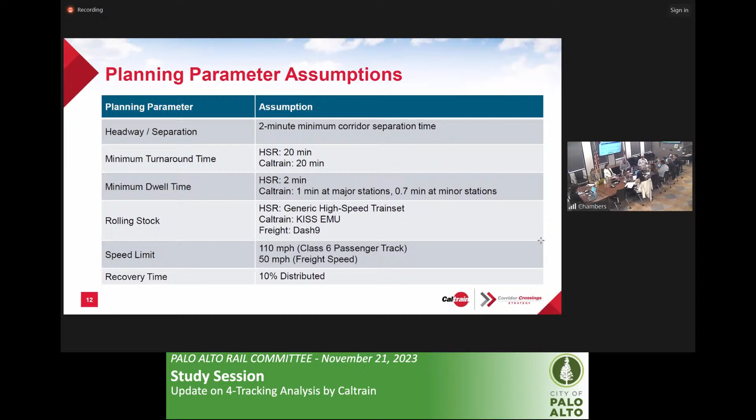And then just one item, as Councilmember Burt mentioned, in terms of having recovery time or accommodated time in the schedule—there is 10% of that distributed across the corridor, and that's to be able to maintain on-time performance. That's the reason why it's there.

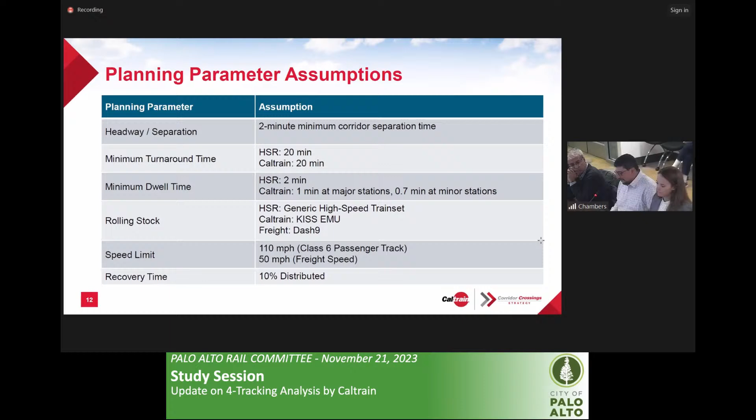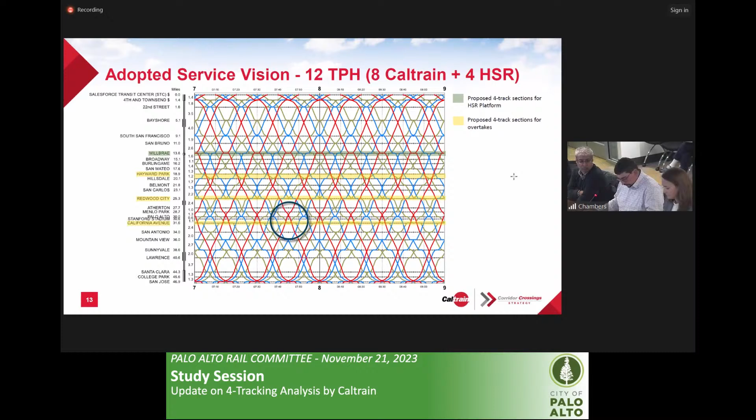And the technical term for those who are interested is string line diagrams.

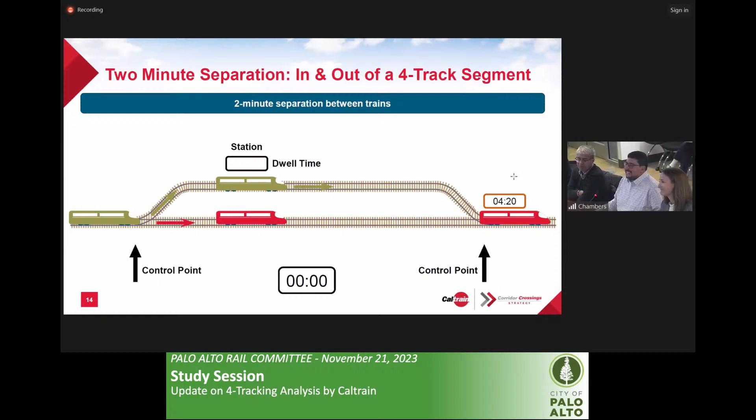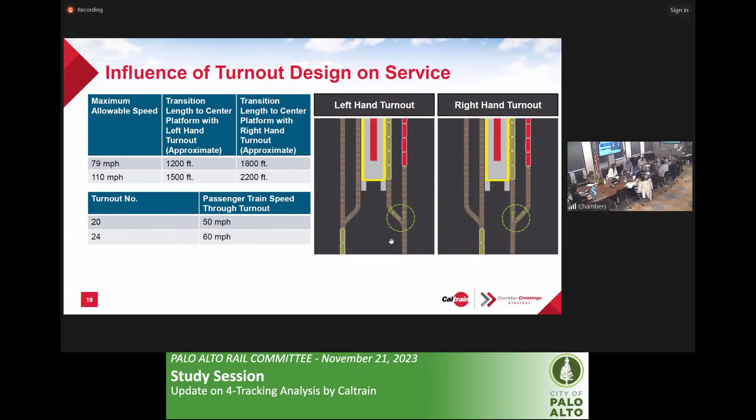Can I ask a quick question? I think Metrolink uses turnout number 24. I'm curious, does anyone use one that's designed for faster speed above the 24? Currently in operation, no. So that's why we're conservative with the number—24s. Thank you.

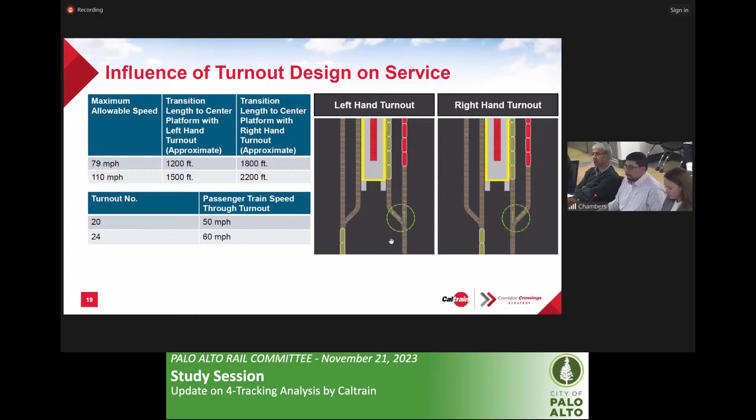You mentioned the need for, or preference for, space for a vehicle on the outside of the track—so is that a necessity or a preference? It's preferred, and whether it's a necessity depends on the conditions of the location, so it's context sensitive. Typically, yes, a railroad would want to have space for a vehicle to be able to go. The reason is that a vehicle has to go onto what's known as high rail to get onto the tracks, and there are specific points where a vehicle can and cannot go onto the railway. So high rail is when you have a maintenance vehicle actually running on the tracks. On the tracks, correct. And what's the downside of that again—there are places you can't do that, you said? It's because it can affect the operations of the corridor, so you try to minimize that as much as possible. Got it, okay, thanks.

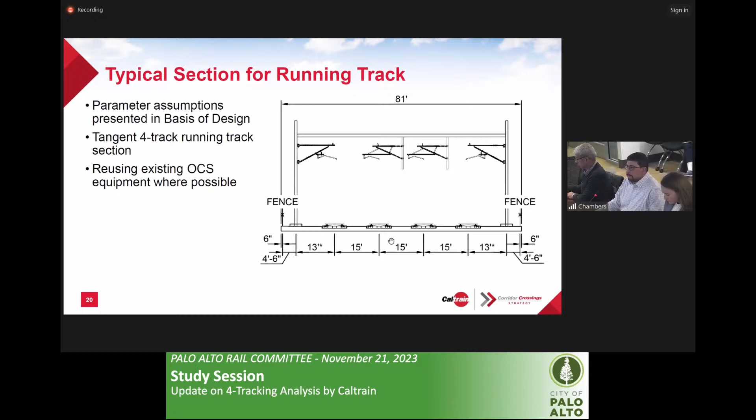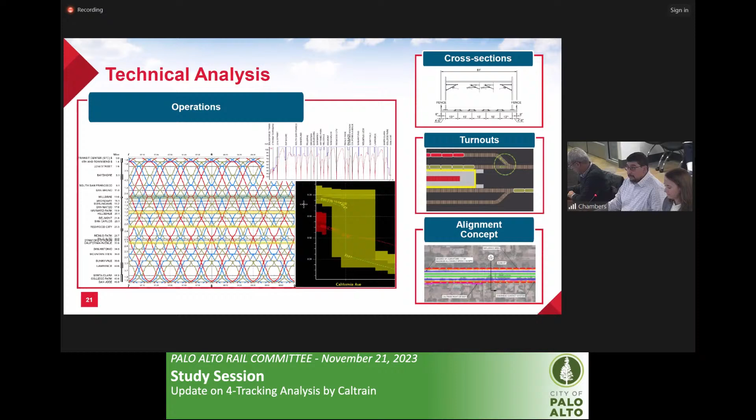The technical analysis utilized all these tools. We looked at operations, cross sections, turnouts, and alignment designs, and applied that in different ways to understand those trade-offs, as I mentioned in the triangle, and to understand the operations relative to the physical space and vice versa. We applied this all together, and frankly applied it to the segments. So let's jump into that and what we've observed, starting with some very illustrative diagrams, and then we'll move into more of the constraints that we observed and analyzed.

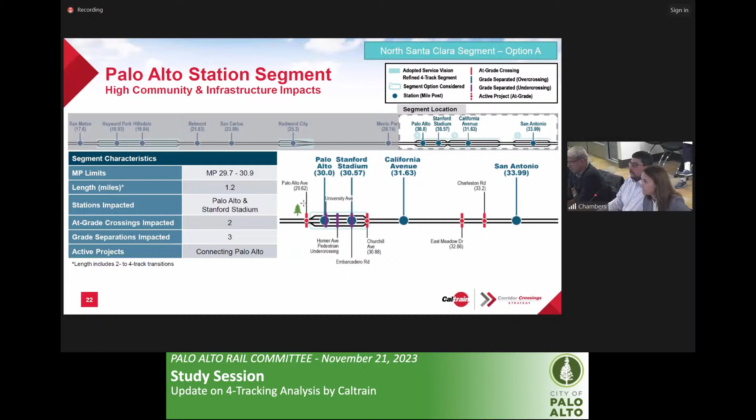In the Palo Alto station segment, the key takeaway was high community and infrastructure impacts. To orient the group, we have the track chart from earlier, highlighting the segments analyzed and their characteristics—the milepost where it starts and ends, the length, the stations, and any grade separations or active projects, at-grade crossings or grade-separated crossings. This was the Palo Alto station segment, looked at from Palo Alto Avenue to Churchill Avenue. This is an important distinction and assumption of ours: we worked as much as possible to avoid grade crossings, or to allow transitions to occur at or outside of those grade crossings, to be a good partner for future grade separations. That was an assumption we worked toward as much as possible—from Palo Alto Avenue to Churchill Avenue.

In this segment, there were some key constraints that we wanted to be cognizant of.

Here's the reason why we also avoided Palo Alto Avenue as a crossing. Well, there's the San Francisquito Creek Bridge and the El Palo Alto tree, so we said let's avoid that for now. That assumption could be questioned at a later time, but that was at least our starting point.

El Camino Park, the softball field there that's adjacent to the railway. The Palo Alto Southern Pacific Station is a historic resource and designated as such, so that's an important component there. The Alma Street and University Avenue interchange, both the bridge and those interchange components towards Stanford University and downtown Palo Alto. And then Sutter Health Center towards the right, being able to understand some key community assets and resources.

One other thing this picture shows is that, contrary to our intuition, the tracks running through the University Avenue area are not straight. That's a legacy from 100 years ago when the University Avenue underpass was built, and so they have a dog leg there.

Is it severe? Well, not severe, you can see it visually. Yeah, so you can see this offset here. But it matters - it's built on the shoofly. Yeah, they kept the shoofly track. They built a shoofly track, and it stayed there for 100 years.

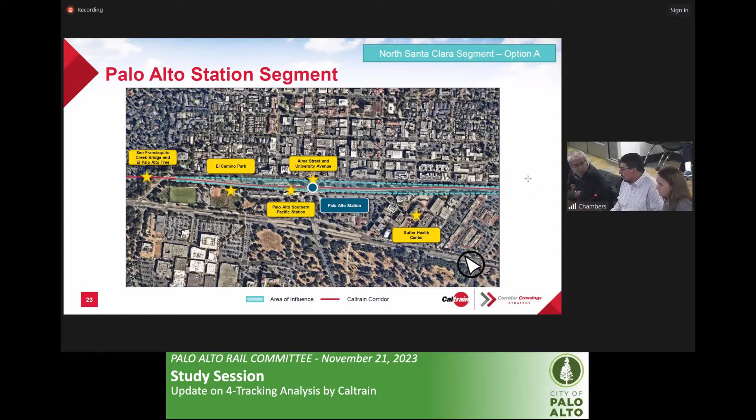And so with the Palo Alto station segment, we do have a hand up. Do we want the - oh, sorry. Oh, gotcha, thank you.

In this case, we did look at just, again, footprint to be able to understand those trade-offs, be able to see where does that fit, how do transitions occur when you do have curves, and just be able to understand those outside limits, and start seeing how far it potentially encroaches onto the University Avenue Alma Street interchange, and how that could be reconfigured if necessary. So that was just highlighting the extents horizontally of a 4-track segment at the Palo Alto Station segment.

Does it ever - in this section, in this modeling, does it ever touch housing that would have to be removed? In this case, it did not touch housing.

Okay, thanks. Correct, but it's way wider than the current overpass. Yeah, it is. And that's to be able to accommodate the station and the 4-track through this segment.

Also, sorry, and also to note, it looks like it, apart from going right up against Alma in the places where it doesn't go on over Alma, it looks like it goes right into the Sutter Health Center on the bottom right.

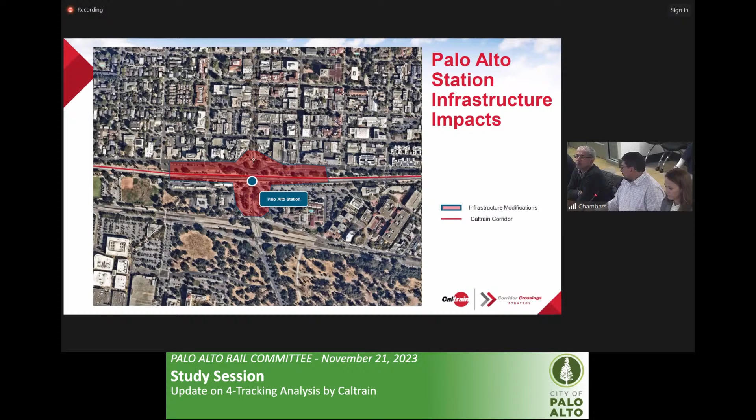At the Palo Alto Station, there are some infrastructure challenges and constraints. As Councilmember or Chair Burt mentioned, this is a very well-patroned station in the corridor, both for rail and bus operations—this is the bus station as well as the transit center to the north. But it's that infrastructure plus the interchange to the east that is critical, which would mean modification to roadways, et cetera.

For the California Avenue segment, there are limited, I would say less, community and infrastructure impacts relative to the Palo Alto segment. In this case, it's the same information on the left in the table. We looked at Churchill Avenue to East Meadow Drive, identifying the ability to stay within the extents as much as possible from those at-grade crossings.

Is it correct that it's not inclusive of Churchill, it's immediately south of Churchill? Correct, our intention was to stay outside as much as possible of those at-grade crossings. And because the distance is longer between Churchill and East Meadow Drive, we're able to have those transitions occur inside those grade separation crossings.

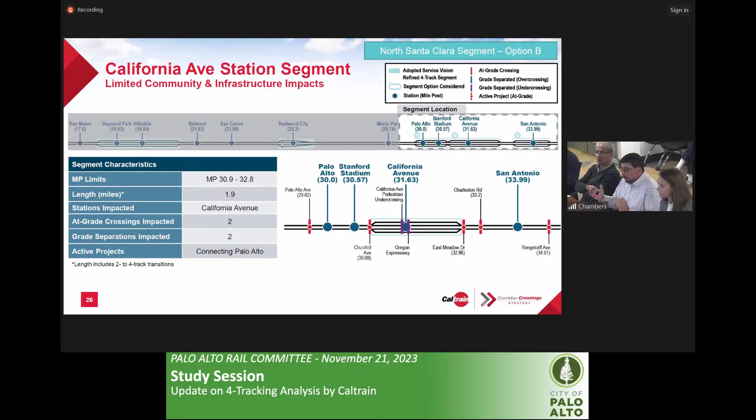In this location, there are two key assets or constraints we identified—actually there's a third we'll flag in a moment. Going right to left: Oregon Expressway interchange is a key infrastructure asset adjacent to the station, and we'll highlight why that's important. Alexander Peers Park is to the north, and there are homes and a community adjacent to the railway to the north.

In this segment we show the influence area of this 4-track. You see the transition from 2 to 4-track, a little bit thinner here. We do see that the influence area extends into Alma Street and adjacent properties. The intention is to understand those trade-offs, to see how those constraints and trade-offs can play out.

If 4-track were to be further evaluated or implemented on the California Avenue segment, we want to understand those constraints and challenges. At the station, as you can see, it's a wider footprint, similar to the Palo Alto station, and that can have an influence on the Oregon Expressway infrastructure.

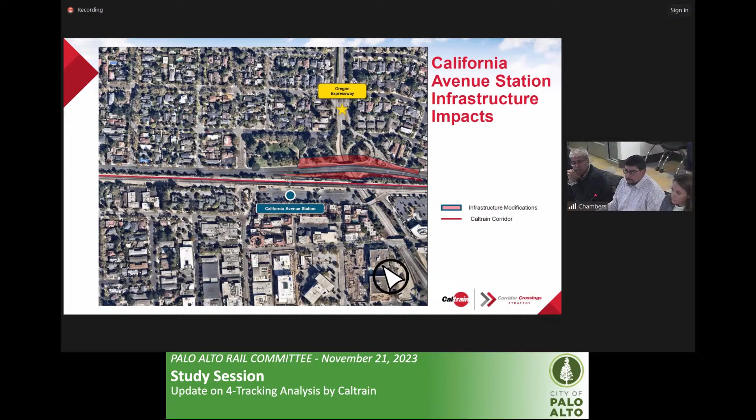So you talked about some of the benefits of having the longer 4-track, but obviously there are trade-offs, especially going through a residential neighborhood. Could you have option B be shorter?

That option was explored. The challenge is then the overtakes—the shorter the overtake, the longer the dwell is at the station. That would mean a longer dwell time. Already, as part of the analysis, the typical dwell time is 1 minute. We're already going to observe a 4-minute dwell time at this California Avenue station, or at a station in North Santa Clara County. So even with that length of 4-track, the dwell time would be 4 minutes.

Correct, so if it were shortened, it would be longer. But in a sense, and not to overly complicate things, we have these remaining options A, B, C, but arguably they could even be tweaked somehow. Absolutely. This is the identification, the due diligence, to understand what those constraints are.

The tracks could be translated west, they could be translated east. Keep in mind, I made a caveat earlier that we didn't explicitly look at profiles, so the tracks could be elevated onto a viaduct, which can allow for even more horizontal translation if necessary. This is just to identify the initial influence area, and then allow for subsequent steps to understand how that gets further refined as you allow for profile adjustments. Thank you, that's helpful.

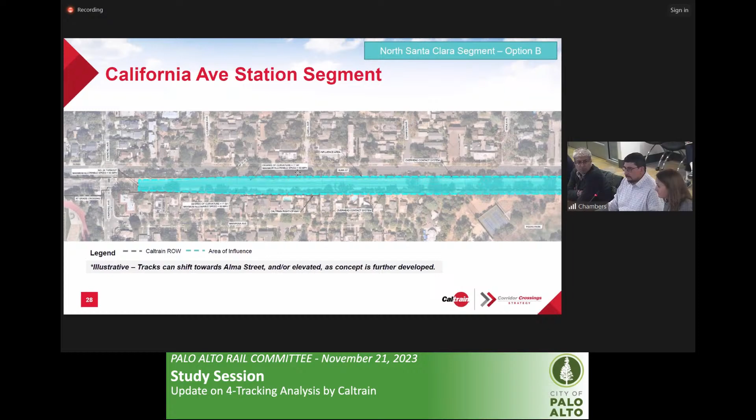Is it fair to say this work was done as a result of Palo Alto trying to move its alternatives forward and trying to understand how alternatives could be impacted? Yes. But as continued analysis of other alternatives and other segments happens, there's a possibility there could be more work done. As an example, we haven't talked about Palo Alto Avenue or the station area or any of the stuff happening in the north. If there was some significant change that could potentially impact things, I'm not saying it would, but for right now the main case of this is...

It's not that a 4-track or a 4-track elevated is being built. It's about how this might constrain any alternatives that we are currently doing design work on. Is that correct? Correct. Looking back again at that PMFA language, Caltrain cannot take an action that precludes or materially makes more complicated the implementation of high-speed rail service.

The San Antonio station segment. This is the third segment in North Santa Clara County, in the city of Palo Alto, that we analyzed. This one does have high community infrastructure impacts and major reconstruction of infrastructure if it were to be selected. In this case, I'm just going to jump to it in terms of the footprint and the constraints.

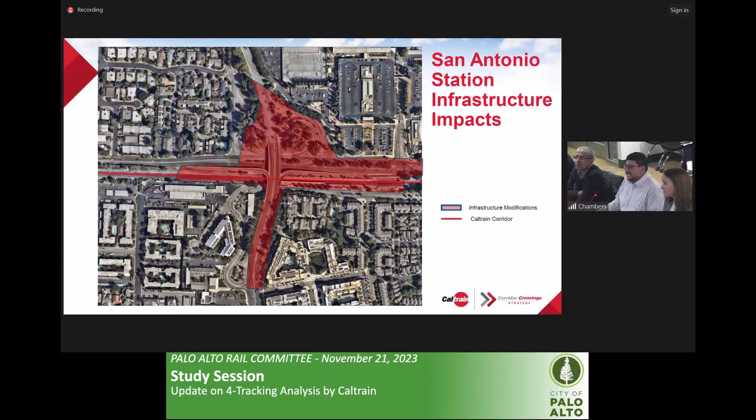So in summary of these 3 segments, really there are constraints in all 3. That's the reality. They all have different varying levels of constraints. However, this was, again, to be able to identify these constraints and understand the trade-offs. So this is just that summary of those constraints.

And the good thing of this homework that we had done at the request of the city of Palo Alto is that it validated those 4-track segments within the adopted service vision. It was analyzed through simulations to understand those limits and confirm those mileposts. Again, it did assume a 2-minute buffer between trains versus 4 minutes, an important assumption. It requires infrastructure to achieve that across the corridor. And it supports and provides that operational flexibility.

What we looked at was not just the locations, but the ability to maintain the high level of on-time performance expected of a railway. In this case, a station at a 4-track segment will have a dwell time of 4 minutes, which is 3 more than the standard 1-minute dwell. One thing to note is that Caltrain is going to continue to coordinate with the city so as to not preclude 4-track within the alternatives the city has identified as part of connecting Palo Alto.